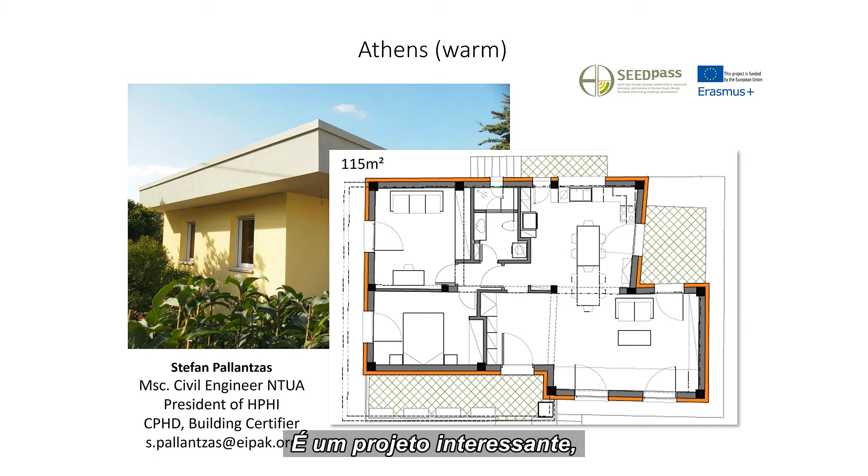And now this is a retrofit in Athens. So it's a really interesting project because we have the simulations through PHPP and some monitoring results. So this is a building, it's now finished, but before it was a building of the 60s. And its envelope was mostly with concrete pillars and perforated bricks in between.

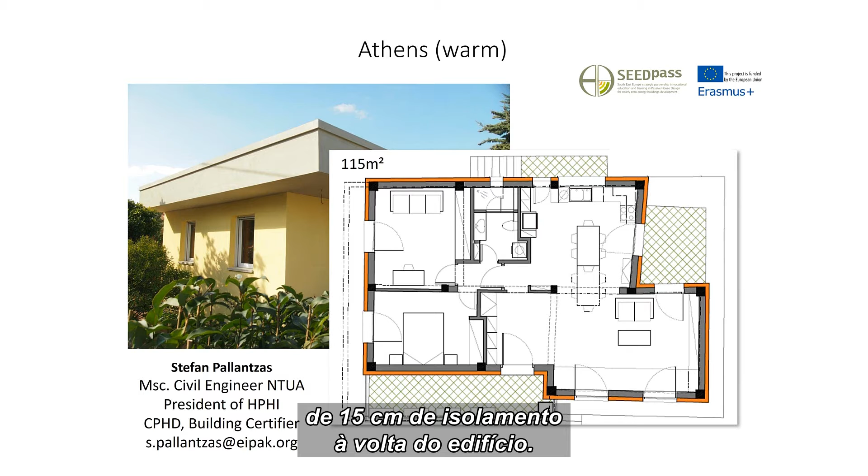And what the owner did, he added a layer of 15 centimeters of insulation around this building. So you can see the U values before. He also added some insulation in the roof and on the slab. Now they are much better. And he also reduced the thermal bridges. So he wrapped the parapet and the balcony with insulation to limit those thermal bridges.

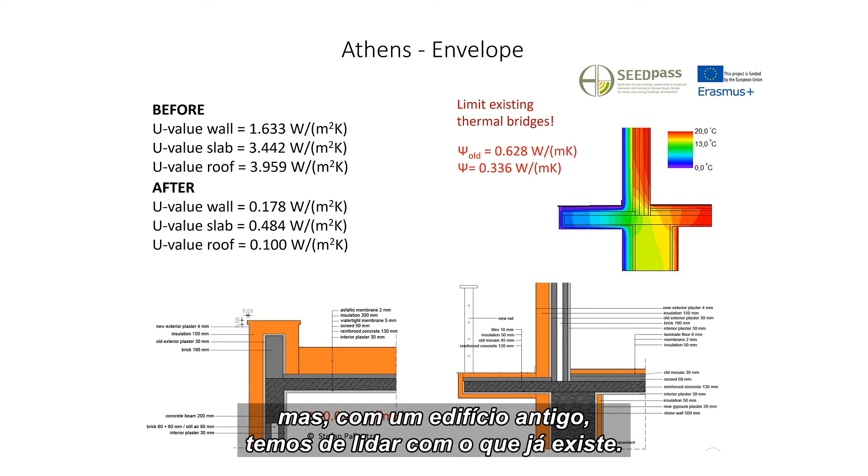This is not the ideal solution for a new building, but for an existing building, you have to deal with what is already there. Regarding the windows, before he had some wooden windows with double sash. He changed them with single sash windows so he can enjoy more solar gains. Before he had single glazing, now he's having triple glazing.

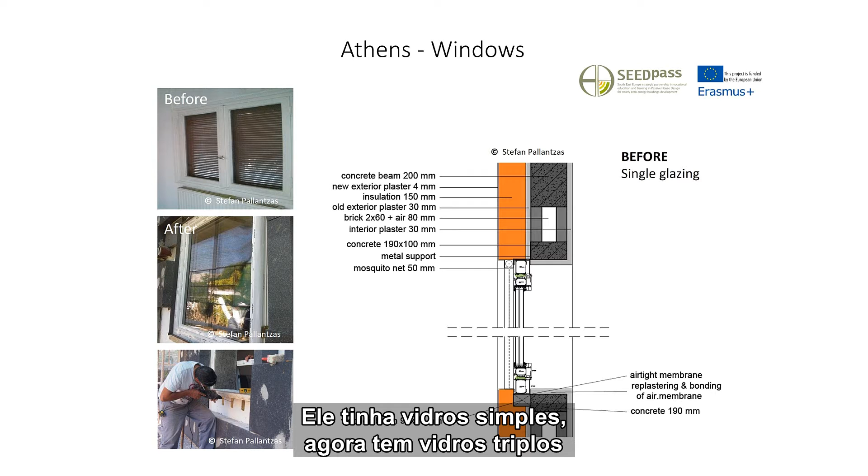And you can see here he's installing it in the insulation layer to limit the installation thermal bridge, which is what we usually recommend. And another thing, he was also augmenting the glazing surface on the south in the kitchen. And he found out with PHPP that this had a very great impact on the energy balance of his building.

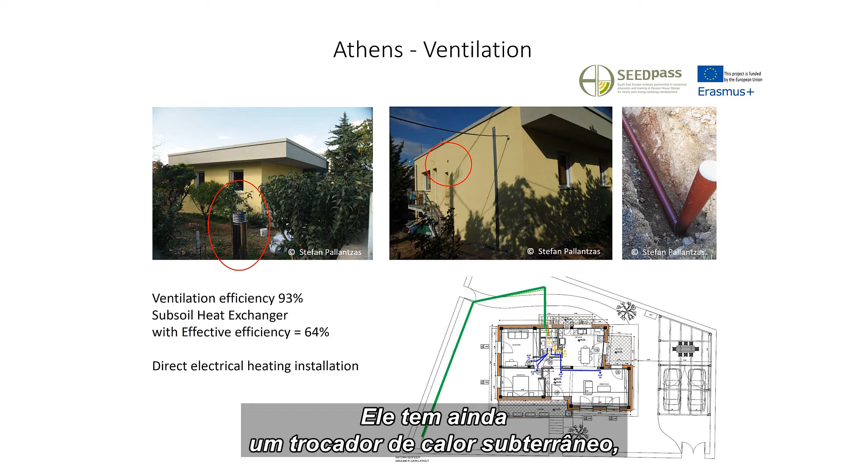Regarding ventilation now, before Stefan had, if I remember well, a boiler and radiators and a fireplace for the heating. And now he has put all this away and replaced it with the ventilation unit that he's also using to distribute heat in his building. He's also using a mini split, mostly for cooling, but it's also useful in case he would need a backup for heating. And he also has a subsoil heat exchanger to preheat or pre-cool the air before it arrives in the building.

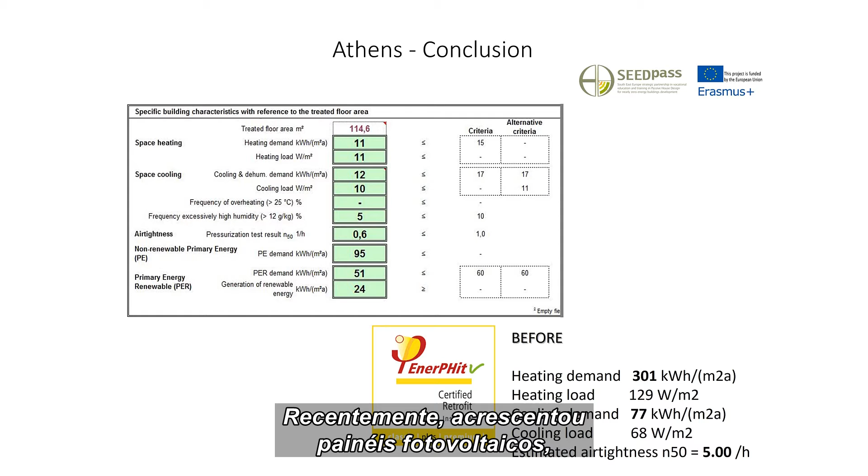And these are the results. Now you can see that if he wanted to heat his building to 20 degrees in winter, he would have had a demand of around 300 kilowatt-hour per square meter a year, while now he has something around 11, which is a very good improvement. Cooling is also lower, and with those values he could have actually certified his building to the Passive House standard, but since he retrofitted it, he wanted to certify it with the EnerPHit standard, and he added recently some PV panels to reach the EnerPHit Plus class.

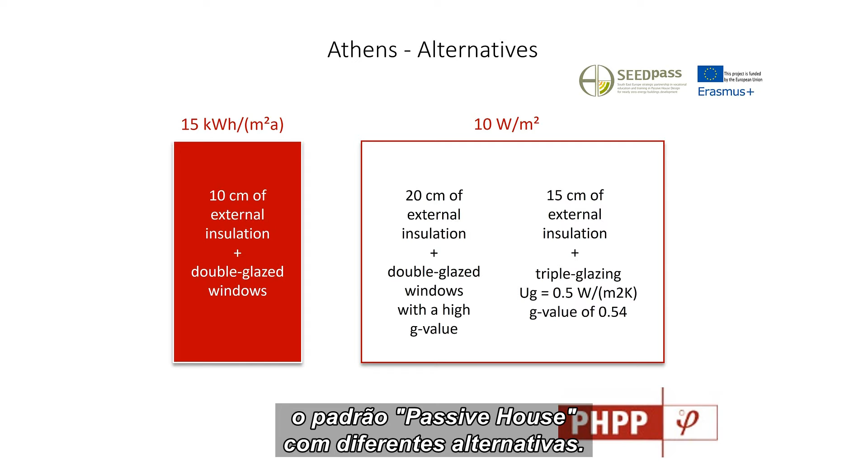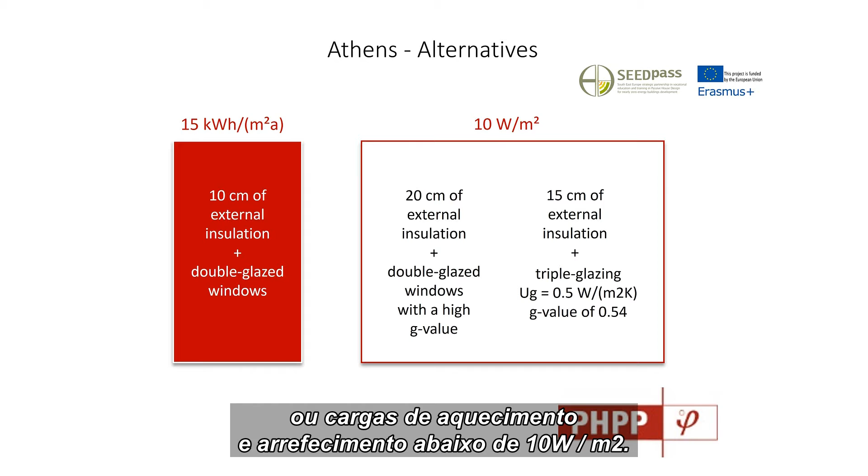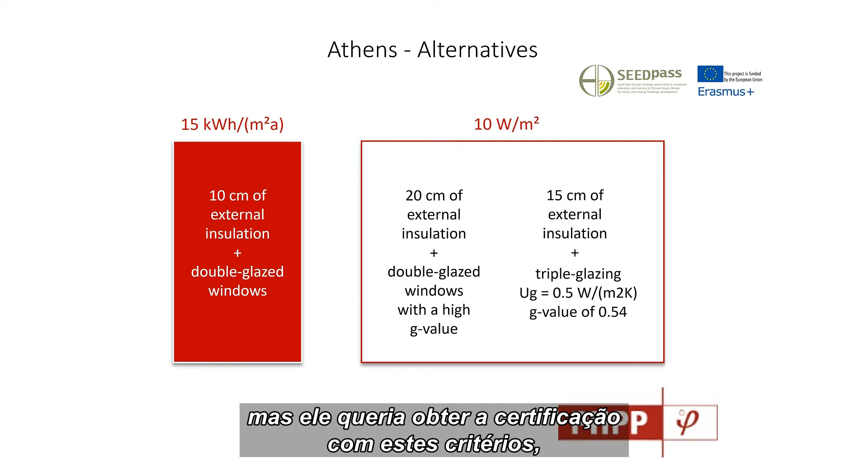Now, really interesting slides, because here you will see that you can reach the Passive House standard with different alternatives. So if you remember well, we can reach the Passive House standard either by having a heating and cooling demand lower than 15 kilowatt-hour per square meter a year, or a heating and cooling load smaller than 10 watt per square meter. He could have reached this criteria with 10 centimeters of external insulation and double glazing, but he wanted to get the certification with this criteria because if your heating and cooling load is lower than 10 watt per square meter, you can usually use the ventilation system to distribute this heating, which he wanted in his case.

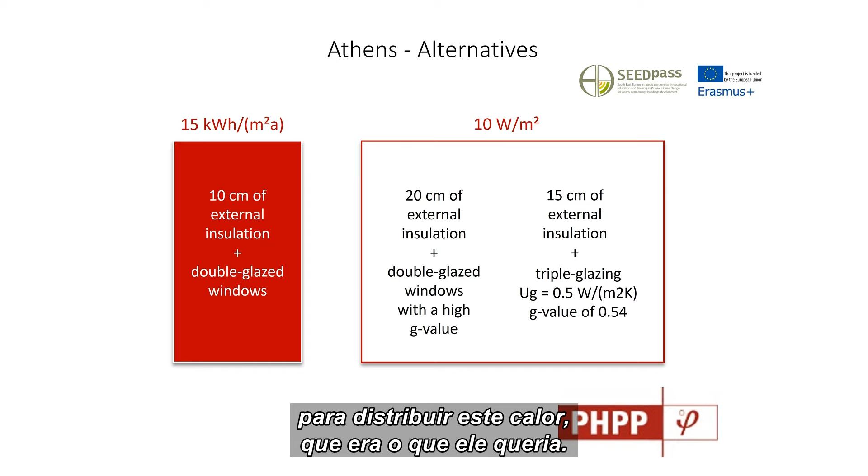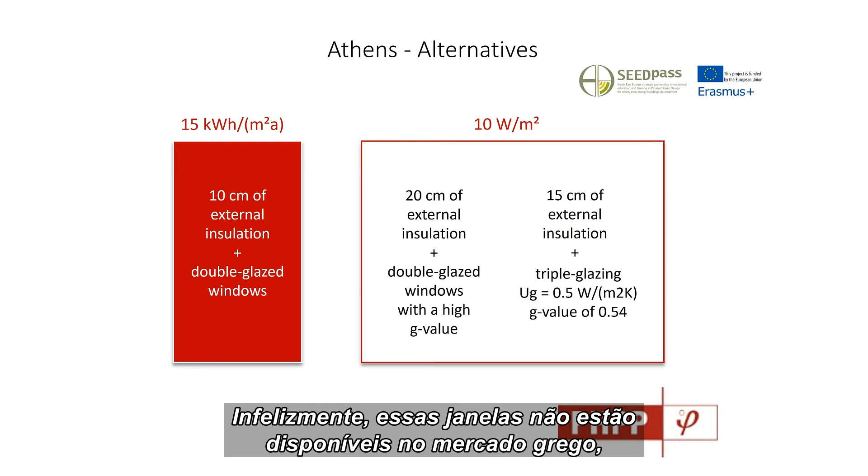So he could have reached this criteria with 20 centimeters of external insulation and double glazed windows with a high g-value. But unfortunately, those windows were not available on the Greek market. So he needed to try another option, 15 centimeters of external insulation and triple glazing, and that's how he reached the Passive House standard. And at the same time could do away with the traditional boiler and just use the ventilation system to distribute heating.

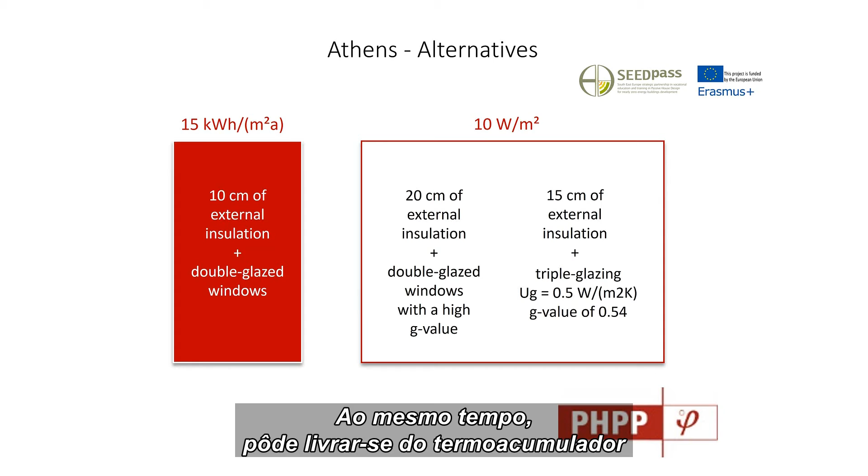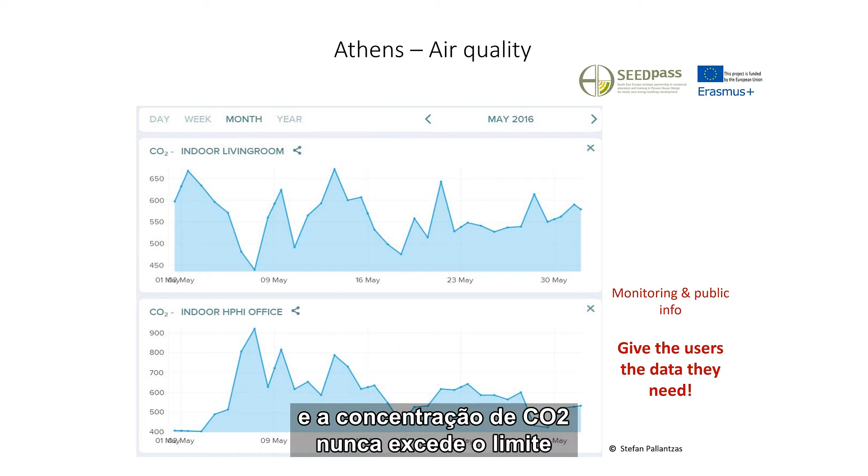So here are the results of the first monitoring. I forgot to mention that there are two floors. The top floor is for the family and the ground floor is with an office. And you can see here that even in the office, the air quality is always very good. The CO2 concentration is never exceeding the stricter limit of 1000 parts per million. It's around 900 at most. And it's important, as we have been talking a bit earlier, to give the user this data because then they can see that it's really working.

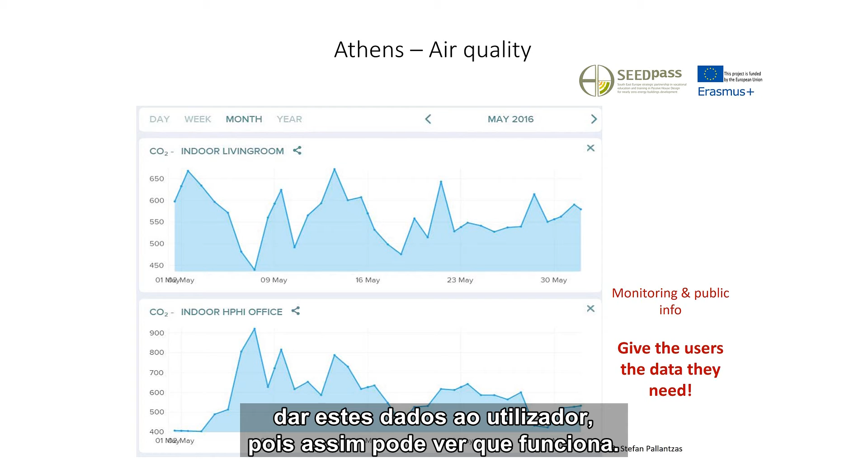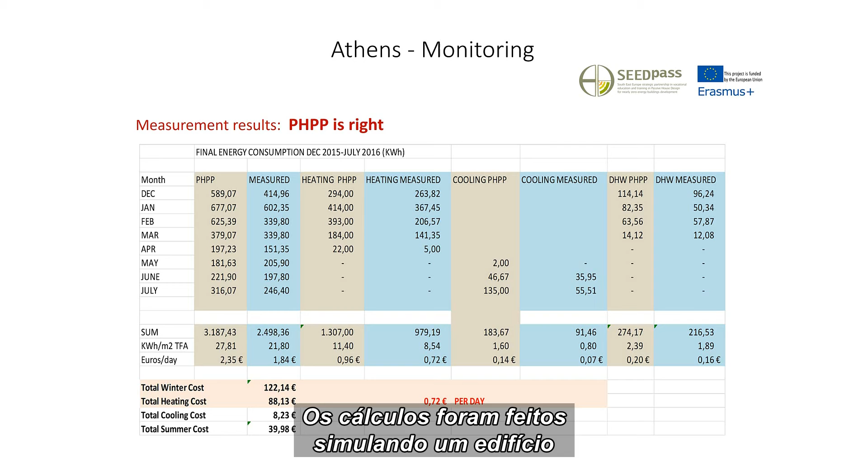Now, these are data about the heating demand and the cooling demand in the first months of monitoring. And you can see that the deviations are really small between what we have simulated with PHPP and what has been measured so far. Maybe here there's 6 kilowatt-hour per square meter of difference. But what is 6 kilowatt-hour in comparison to the 300? And also we're simulating a building with climate data that is taking an average of the past 30 years. But it could be that in this year, February was a bit colder than usual or warmer. It's always depending on the year.

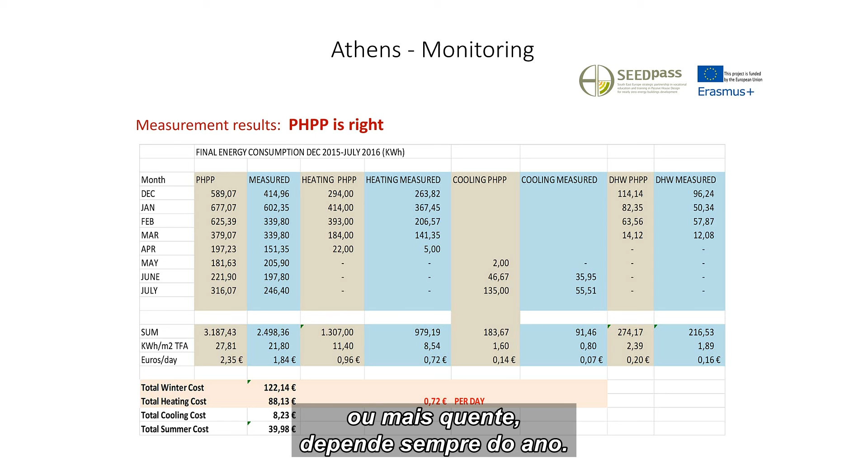And now coming to cost. So in PHPP, I've mentioned this morning that there is a sheet where you can compare two variants according to cost. In this sheet, you can enter the energy price of your country, and how much your investment cost. So this project retrofit cost almost 50,000 euros in total, which is a normal cost for Greece for a retrofit, and represents 400 euros per square meter.